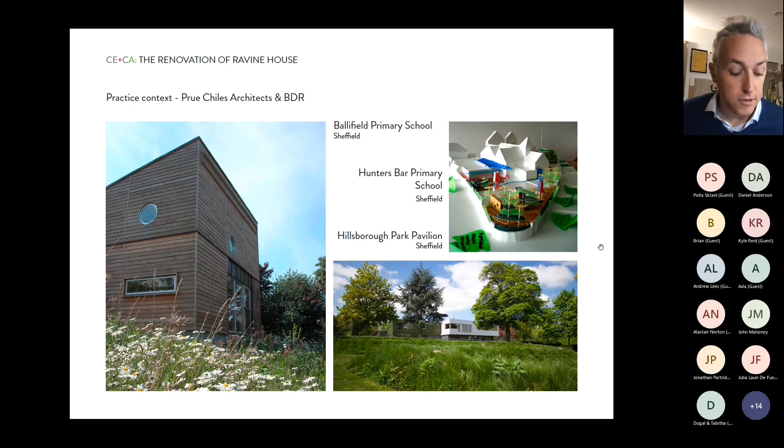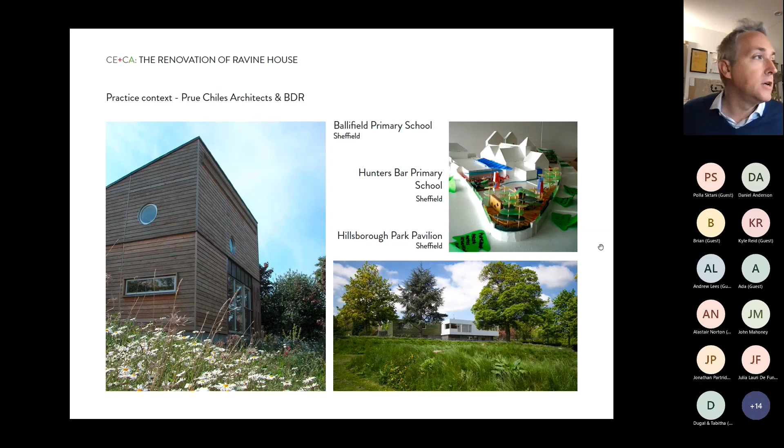So Ravine House - I think our journey to Ravine House starts a little bit before that. The practice was actually founded back in 1999, 2000, and was Prue Chiles Architects. We were sat predominantly very closely to the university, with Prue being practice director, and we started life as a research practice. Through that, we got to work on some brilliant community projects. There was a lot of focus on community-led practice, and we developed a research wing called Bureau of Design Research. Through that, we started to refine what we were interested in.

Our very early work was very much guided by what we term these days as sustainable and retrofit. The first projects being extension to school as part of Classrooms of the Future, and Hillsborough Bowling Pavilion. We were doing a lot of research into schools through this period of time as well.

And then that led on to a focus on domestic and residential architecture and the idea of domesticity, the patterns of life, and how people live, how we can impact as architects on their life, how we can change the way that people live through simple but careful design.

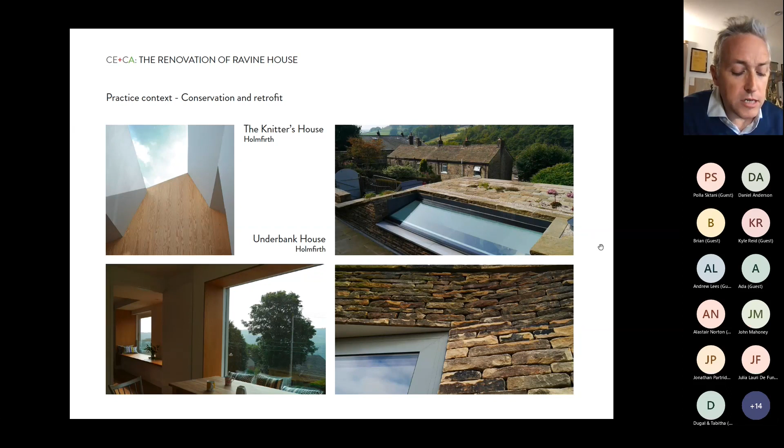And these are a couple of projects that we did up in Holmfirth, Knitter's House and Underbank House. Both of those really concerned with turning living on its head, making spaces where, in a slightly unconventional way, but really spaces that were driven by the landscape and view.

And I think since then, we've really gone down a route of making beautiful but sustainable architecture. I suppose we don't badge ourselves as passive house experts, but it's very much about how you get the fabric of the building right first - how you tackle that kind of insulation, windows, and dealing with energy conservation through getting the space right.

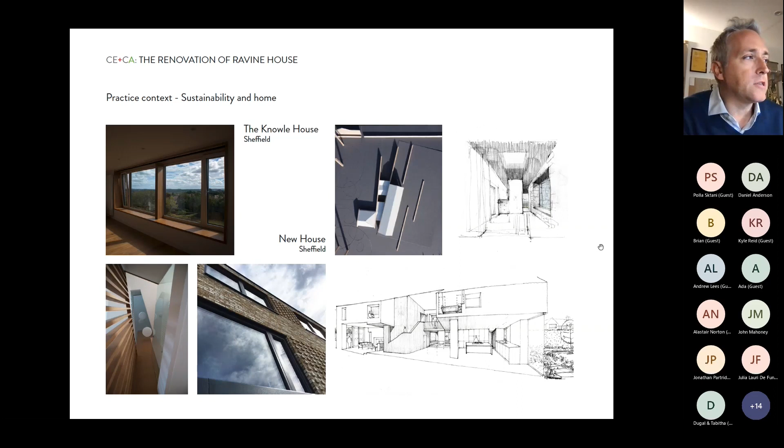And that's led on to a few of our other projects, sort of deep retrofit. But we've never forgotten the idea of community-led design either. So we've worked in schools across London, where essentially we're down there not because of our practice credentials as architects, but more as our credentials as a community and consultation-led practice.

And I think that also led to a strong impact in terms of some of the competitions that we've entered. From times gone by, the Green Homes competition up at Arbourthorne - obviously there was a scheme there that was built by Matthew Lloyd Architects. We still like to think ours is slightly better though.

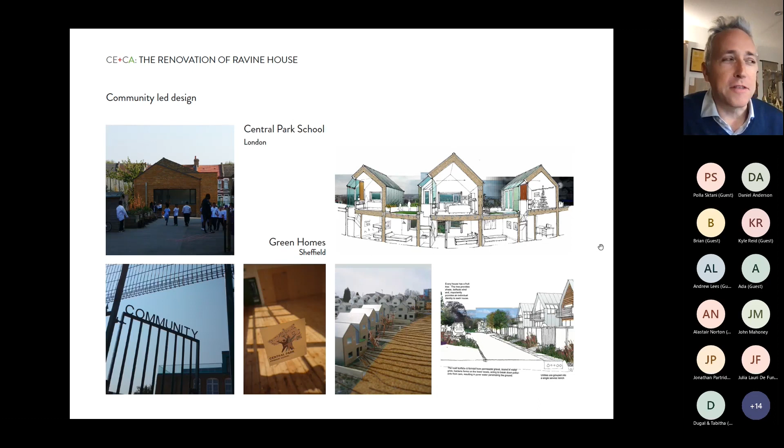And we continue to write as well. We continue to practice as researchers. Leo, Prue and myself are all part of universities - Prue at Newcastle, Leo and myself at Sheffield. And that remains a very important part of the practice, that all of our design work is impacted by our teaching and research practice.

Some of that is about making architecture fun for the users. The project here, Earlham Primary School, was about taking the worst spaces in a school, the toilets, and making them into something sustainable, and making it apparent to the kids the processes that run and operate a building. So the toilets ended up going from the worst space in school to the best place in the school. The school actually had the problem of too many kids wanting to go to these loos, because they could see that by turning on a light, it was generating electricity from the roof.

They could flush the toilets using rainwater and so on. So that sort of sharing that journey with the children became a really key part of that project.

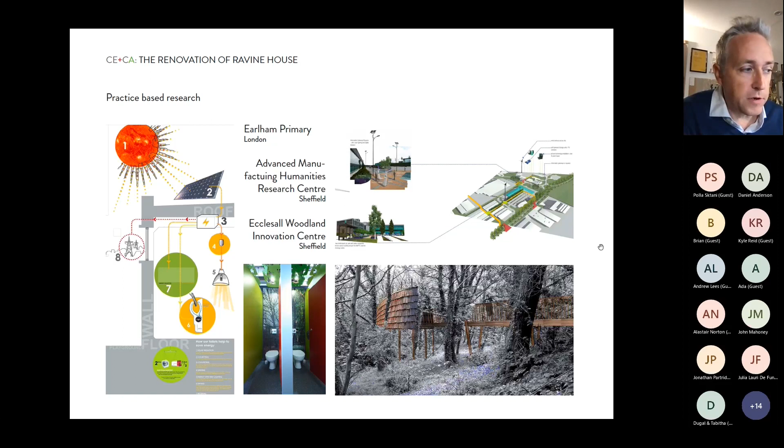And then other parts of what we've done over time is look at more larger scale or infrastructural projects, from a sustainable network of power generation at the AMHRC to low carbon timber design at Ecclesall Sawmill site.

Obviously amongst the research comes publications, and I think this was a book that we were all really proud of at the time. It's only just out of circulation now. We got the final few copies from the publishers last year, but really at 10 years old, it was quite an important publication at the time, focusing on the best practice school design around the world.

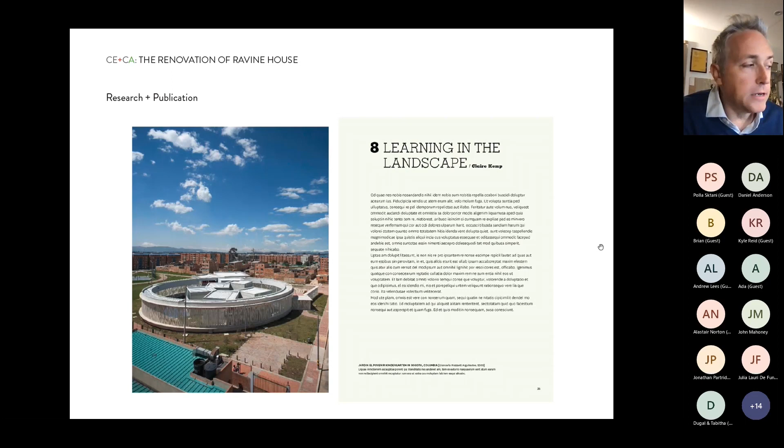So all of that kind of leads us to our approach to Ravine House. Ravine House is a project in Derbyshire, and it was a beautiful building built in 1967. At the time, it was built to the very best of the materials available to them. It's an incredible house, and when we found it, it was in remarkably good condition. It's just that the technologies we use to build have changed.

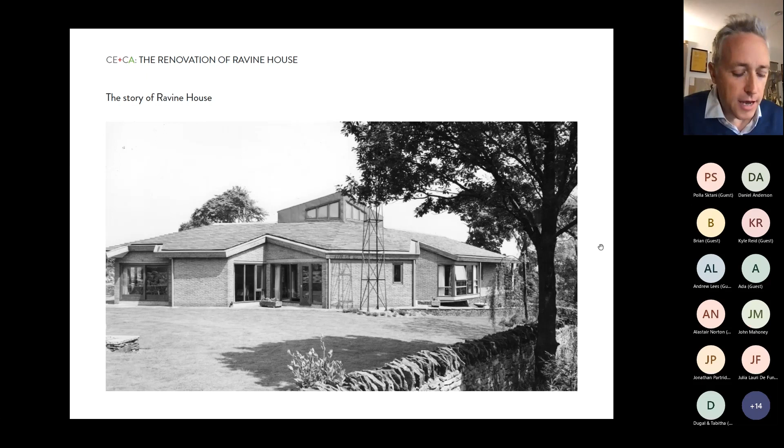Our client's brief was to knock it down and start again, to build it again, but this time warmer please, and they wanted it to look the same. We looked at it and we were like, why would you knock it down? It's incredible. So we took this and argued that this building was really important.

So we took the clients on a journey of digging out of the archives all of these really important things. We had the original plans, and you can see it's this quite geometric plan form centered around the living room at the heart of the building. The blue hatch on the plan at the top was an underfloor heated driveway, and we've got evidence of the clients actually applying to the electricity board to have a substation put in just to power the underfloor heated driveway.

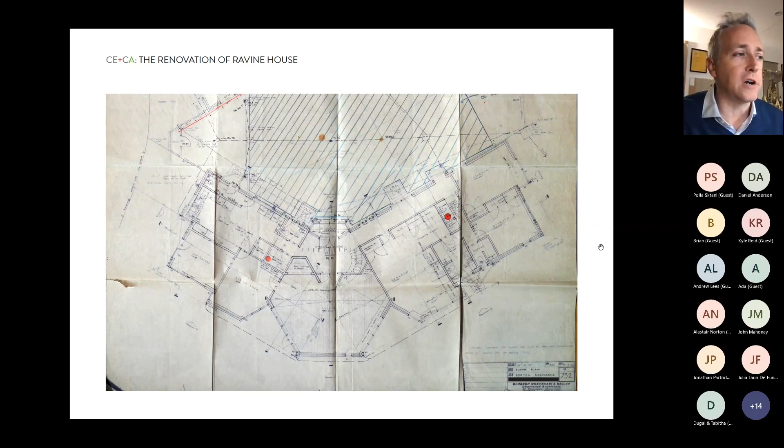So these days we'd look at that and go, oh my God, heating the air, you're crazy. We were really lucky in as far as we had all these incredible documents.

And for those of us who suffer the rigors of the planning process now, the image on the left is the original planning application. They wrote to the council and said, we'd like to build a house because we need it. And the local planning authority wrote back and said, yes, go ahead. No pictures of what this house might be, no pictures of how big it might be, no plans, elevations, sections, design and access statements, nothing. If only life was that simple now.

Other things that were really interesting, we started to get an understanding of the innovation that this project had at the time it was built. The heating is likely to be underfloor electric, and what we found as we unpeeled the layers of the building was very early electrical underfloor heating, which had long since broken. The windows were made to fit the design but using the latest Pilkington fused double glazed technology, so these are some of the first double glazed windows in the country. It's incredible that we've got this chain of communication.

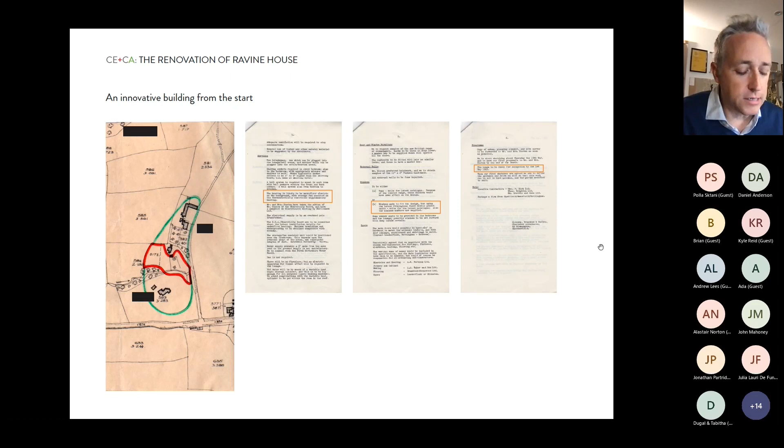And then the house must be ready for the 1st of May 1967. It was a little bit late, and that was because of the windows. So this is the state of the building that we found.

Remarkably good condition, we had a structural survey done and there wasn't a single piece of cracking in the mortar. The roof timbers were fantastic quality, although the roof slates, a concrete tile, were very much at the end of their life. You see things that had happened over time, like the timber work had been stained a deep black, but actually underneath that black stain was really good quality timber with very little rot anywhere on the building. So we were faced with a building that was in remarkable condition, to be honest.

It also sits in an incredible landscape. The landscape was planted long before the house was actually built, so it's always sat in this mature landscape. We even had access to the original clients' and builders' diary for all of the planting - an address book with all the Latin names of the plants listed from beginning to end. So it provided us this fantastic record of a mid-century garden design as well. And you can see there on the contours at the bottom of the map why we called it Ravine House in the end.

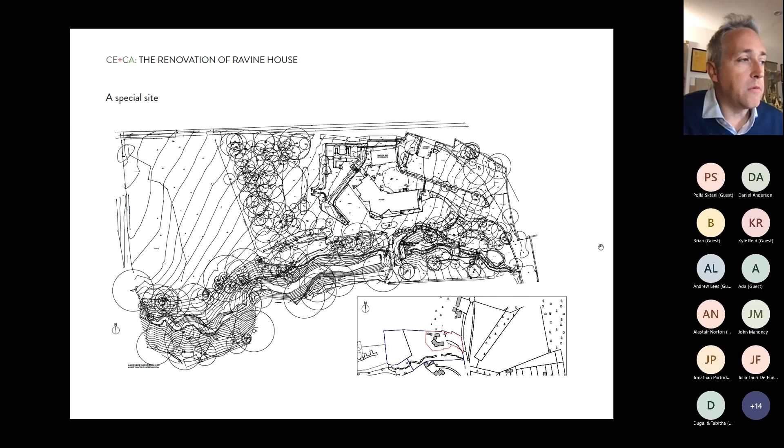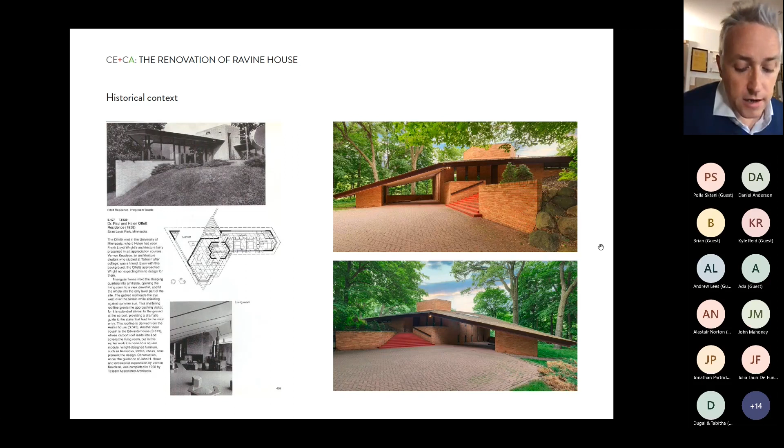As part of this journey of telling the clients what special building they had, we went back through the archives and found this building - the Olfelt House by Frank Lloyd Wright. It's one of the last Frank Lloyd Wright houses built, dating to about 10 years prior to this, 1958. The plan form has so many similarities: these two wings, this geometric shape, the long overhang roofs, even down to the depth of that roof and the chamfered eaves, and the way that building sits on a plinth in the landscape. So it became apparent to us that this building wasn't something strange within the Derbyshire countryside - it was actually really well informed by architecture that would have been in vogue at the time.

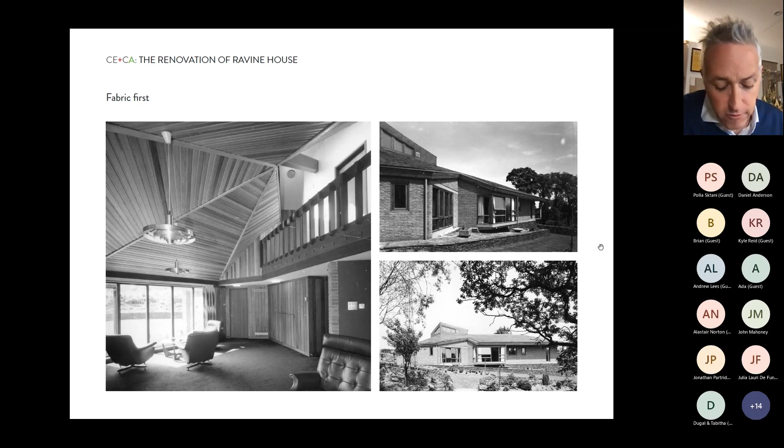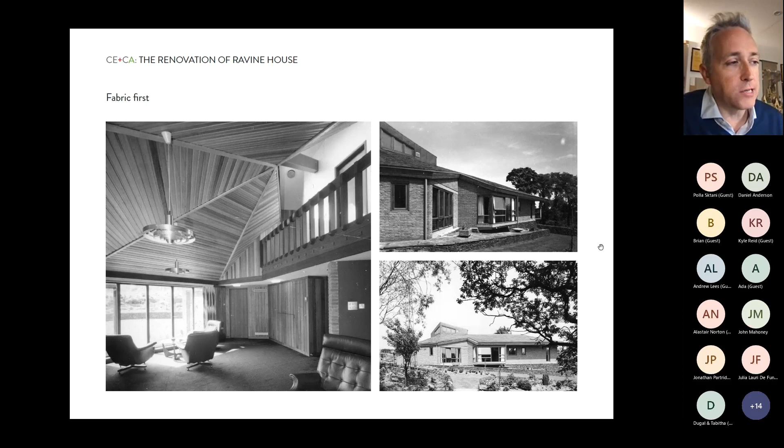This central space, the double height living room with this wonderful Parana pine ceiling - we decided that whatever we did, you'd never be able to replace that, so we had to protect it at all costs. Then you can see the garden elevation, the younger planting around the building at this stage, and the way the building sits onto this stone plinth as the topography shifts down.

So all of this built a picture with the client, and this is how we helped the client understand how special their project was. We managed to bring them on board with the idea that this wasn't a new build, it was actually an in-depth conservation build.

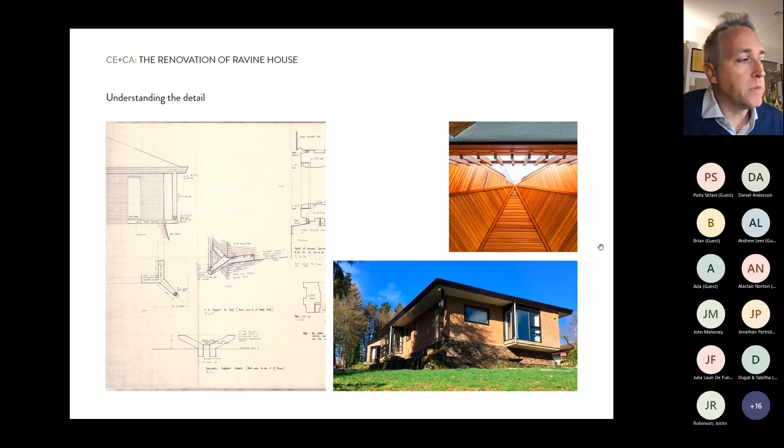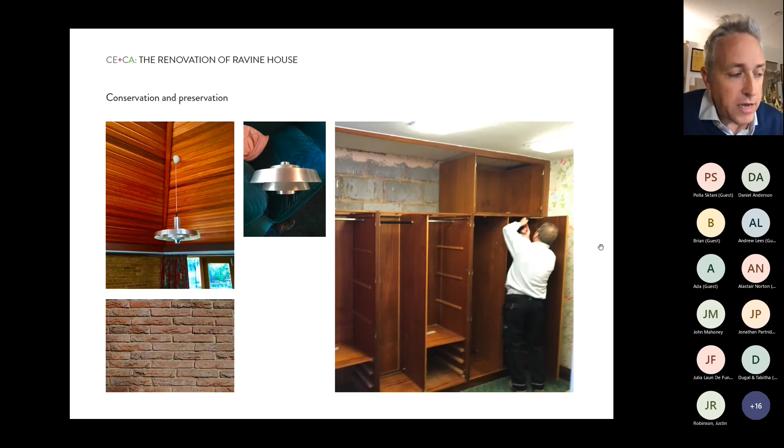So we had this wonderful trail of information, which led to a very rich knowledge base before we started pulling the building apart.

We were very lucky to have a really good team around. The client was really heavily engaged, and we brought the contractor on at a very early stage. We had an energy consultant, because as the project evolved, we decided it wasn't just about conservation - it was about, if we're going to do this and make the building warmer, how do you do that in the best, most sustainable manner?

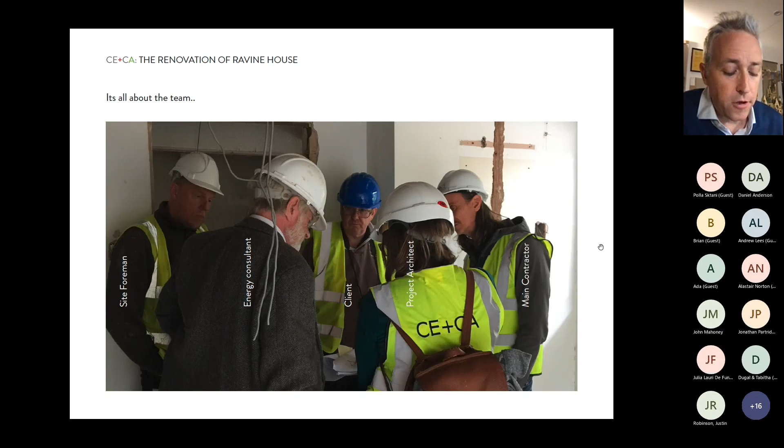So we reached out, and at this point we started to look at the whole house energy system. The consultant was able to advise on ground source geothermal heating, PVs and MVHR. Then there was the expertise of the site foreman, with their interest and specialist knowledge in working with this age of building, but also working on ultra-low energy homes, passive houses, etc. So this is where we ended up with the whole house energy system.

On the left, not proposed—on the left it was the initial stab at it. So we were going to remove the gas connection, we were going to have the MVHR system, and we were going to wrap the whole building up in a sealing layer.

In the end, what we did was we removed the gas connection and dug a borehole. The borehole provides both drinking water and heating water, then returns the excess water to the stream nearby. So we've got a heat pump, underfloor heating, the building's airtight, and we've got an MVHR and solar panels which generate enough electricity to counter the impact of having all of these pumps running almost constantly.

Down the bottom of this page are sketches we were doing in stage 1 work, really early in the process, working out whether it was achievable to actually retrofit this building without taking away too much space internally.

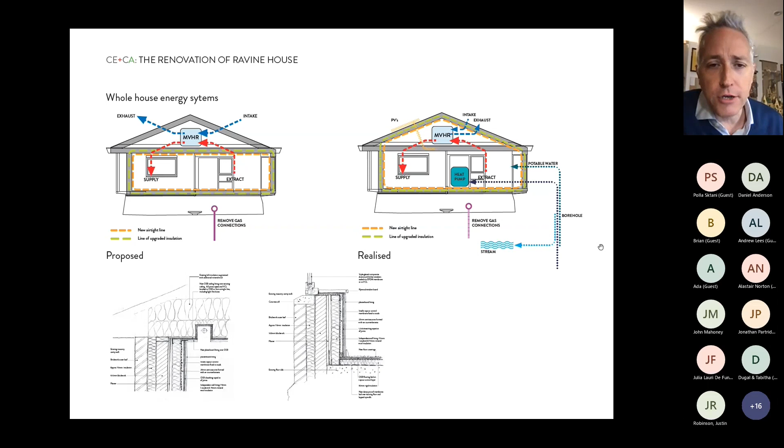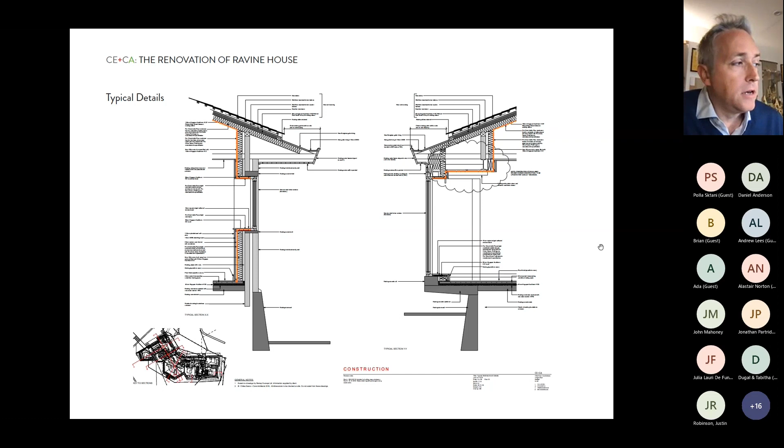Typical details—it's really hard on a project like this, doing retrofit, to get all your airtight layers in, particularly where you're wrapping around existing bits of structure, trying to iron out cold bridges. When you didn't really heat the building in the 60s, cold bridging wasn't really a particular issue, but as we were raising the standards throughout the building, we had to be very careful that we weren't going to get dew points in unexpected places. So the strategy evolved as we moved along.

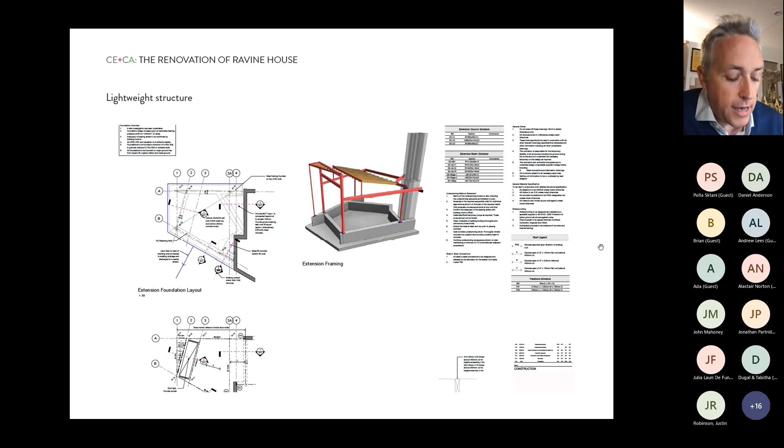The other part of it was where we were adding to the building, we wanted to make sure it was a very minimal structure, that we didn't add lots of heavyweight stuff. The client threw us a curveball—they wanted a sunken seating area because that was very 60s/70s. So we ended up with this concrete pit, but coming out of that was this very lightweight steel and timber structure to deal with the extension.

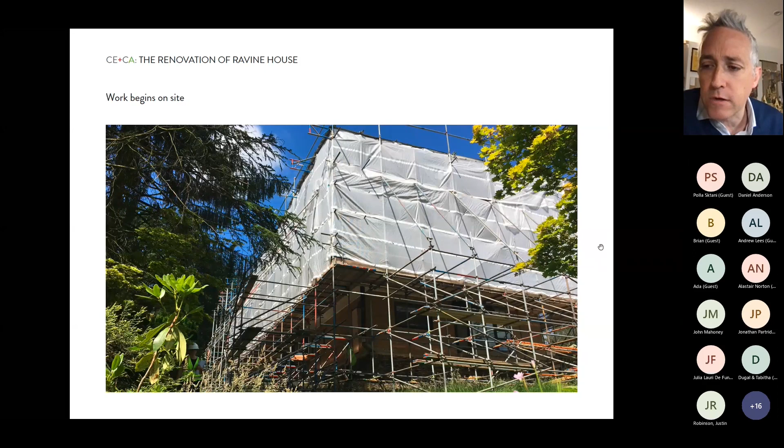Then we begin work on site, and in order to protect that beautiful ceiling in the middle of the building, we had to tent the whole structure. I think the poor client nearly fell off their chair when they were passed a quote for £55,000 worth of scaffold. But the advantage was that we worked throughout all seasons, all weathers, because the building was tented—essentially like working inside a factory.

We were able to peel back the roof structure and find the original roof timbers were in as good nick as the day they went in. They were perfect—there was no rot anywhere.

Having this tent meant we could take our time thinking about details, thinking about how we were going to layer up the building, where the breather membrane was going to go, and how that was going to work as you went—whether we put it underneath or over the top of the joists.

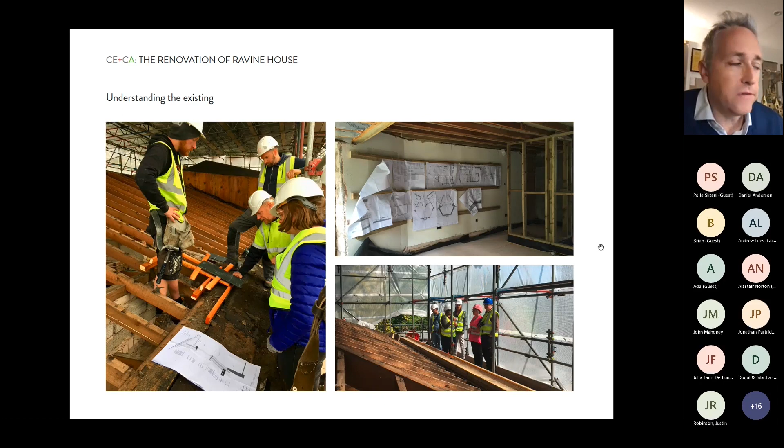That was not an easy decision, because everywhere else we made the decision to go underneath the roof, but where we were protecting this roof, we had no choice but to go on top of it. So it was making sure we had continuity between these layers, between this change of approach between underneath and on top, and also trying to work out very carefully the impact on the eaves of adding in an extra layer of 100 mil of insulation.

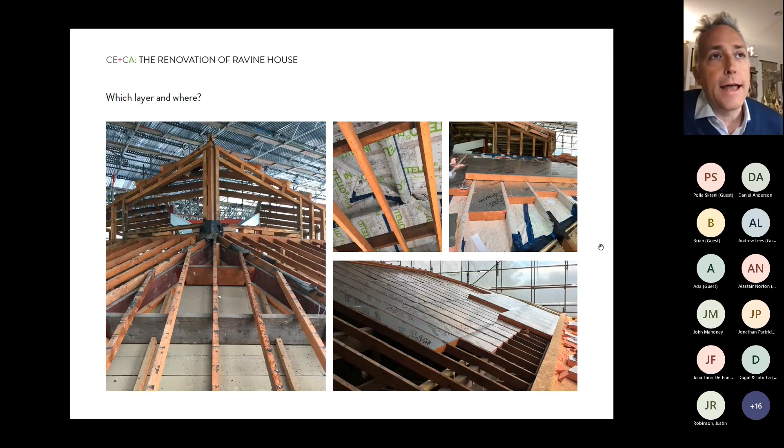We explored all types of insulation as well. We looked at low carbon insulations, but ultimately, because we're working on a conservation project, we had to draw a line and go with the thinnest but highest performance insulation that we could use.

These are some of the results of that—you can see the airtight membranes are all internally installed through the main building, all taped and joined to the wall structure, so we've got no breaks in that.

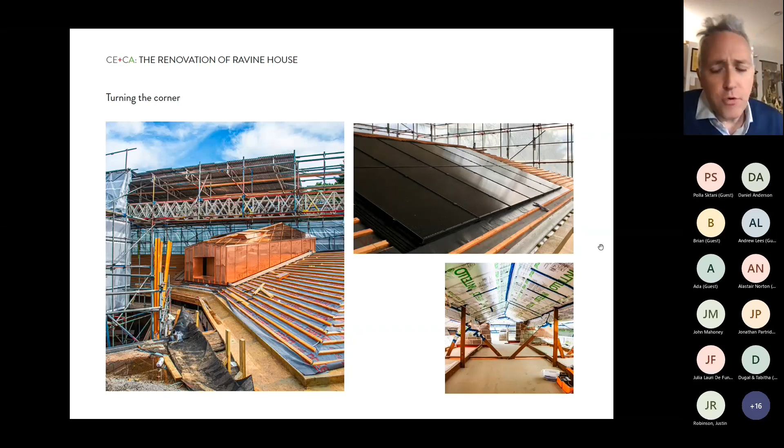We've got the solar panels set into the slate, and we've restored the copper cupola that was originally there. You get little clues that the building has changed—previously the window had been a very surface window, but we pushed the window really deep into the reveal to give it a bit of solar shading from the south facade.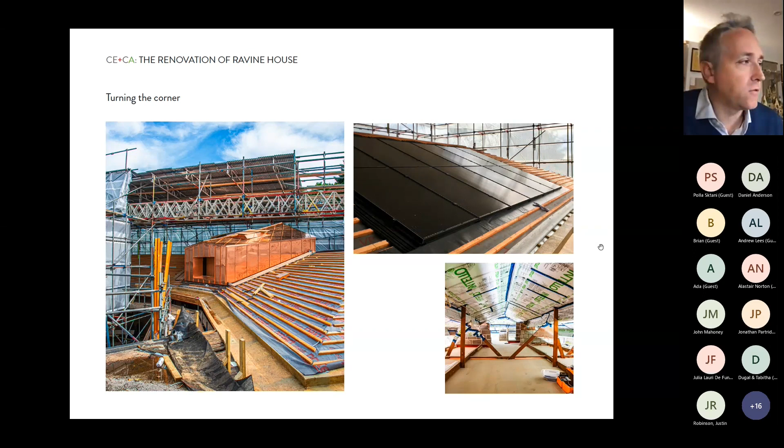And again, this is the extension. This is looking at water control, air movement and vapor control. An incredibly difficult set of parameters where you're working with the structure, with the windows, trying to get the insulation to be as high as we could, but without necessarily compromising other parts of that structure.

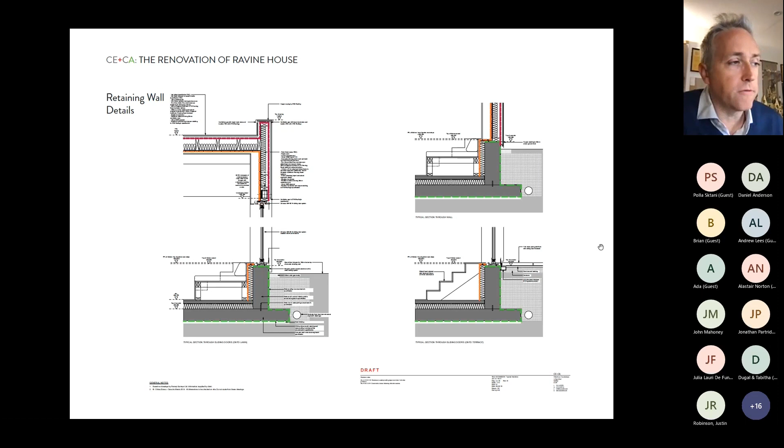We were also really lucky enough to work with some fantastic tradespeople. While we were doing this roofing, it was in the middle of COVID, and the copper roofer was very happy to be on site on their own, working away. That meant we could go up and work with him in real time, refining the details to make sure that where we had integration of roof lights and integration with the existing building, everything came together in the way that we wanted. So COVID actually lent us a favour in a way, letting us slow the process up and work at a kind of pace with the craftspeople.

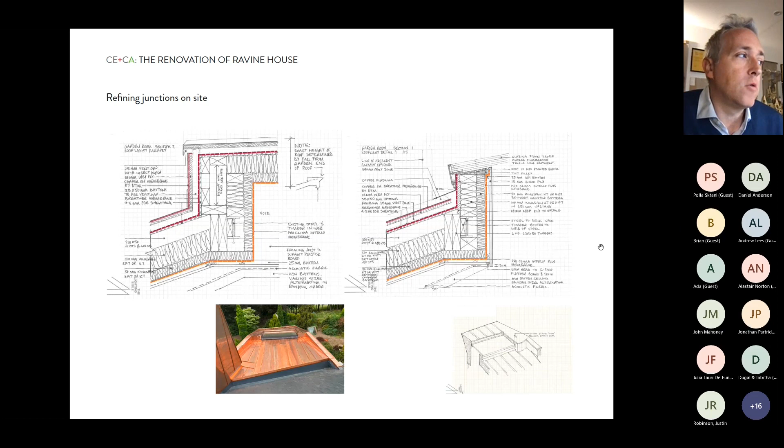Moisture is the bane of all of our lives, I think it's fair to say. We had to work out, in an area with quite a high clay base, what we were going to do in terms of moisture control for the sunken conversation pit.

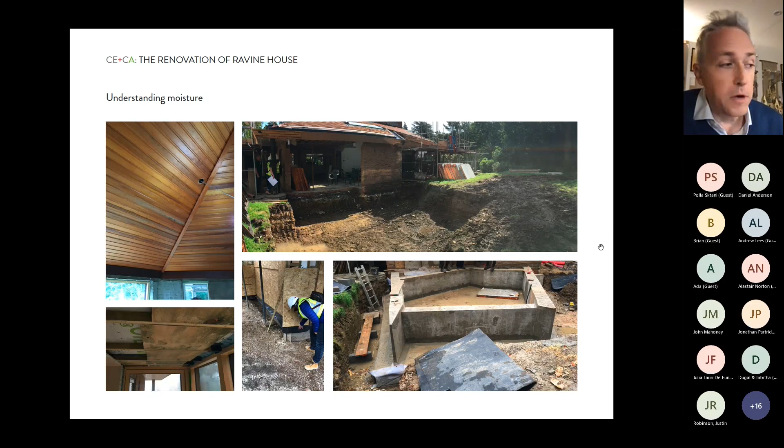Also, we came back after the Christmas recess to find, to our horror, that the roof over the central space had a whole load of surface moisture on it. What we discovered was that in the run up to Christmas we'd plastered out the first few rooms, and the moisture from the plaster, with the building all shut up over Christmas, was enough to put a layer of damp and condensation onto the roof, which had then turned to mold. Fortunately, very simple to rectify, but a moment of horror as we walked on site post close down.

Coming back to the whole house energy approach, the theoretical diagram versus reality: underfloor heating pipes going in at slightly closer proximity because they're running at a constant but lower temperature to deal with the ground source heat pump; digging a 50-foot borehole, actually a 60-foot borehole, into the ground—not particularly deep, but deep enough; and then making sure we're working with the solar installers, joiners and roofers to make sure the roof is as unobtrusive as possible, and then dealing with the MVHR in and out.

Unfortunately for us, the energy consultant changed their mind as to where the vents were going to go too late in the day, so we'd already slated the roof. Whereas we perhaps wanted to go through the roof, they've actually come out through the soffit of the building.

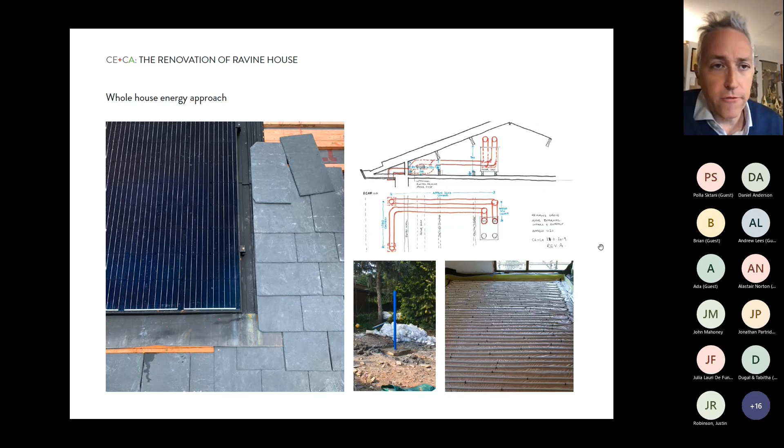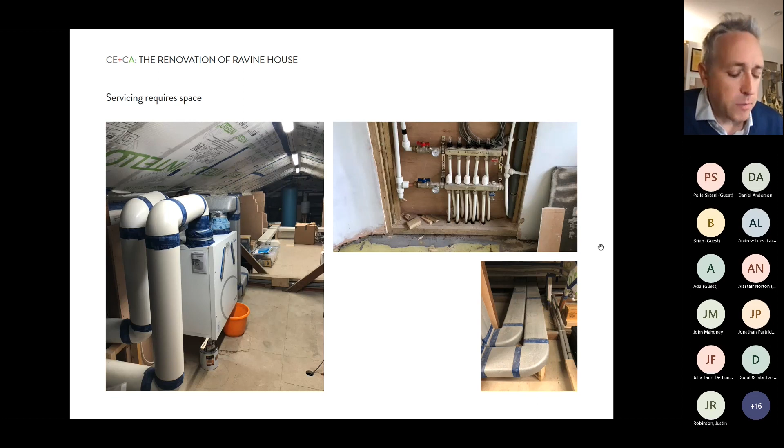I think this is one of the big takeaways from the project: the amount of servicing you need in a building is massive, totally disproportionate to how we think of servicing in a normal house, where maybe you've got a little boiler and a pressurized water cylinder. Actually, with this, we had a big space for the water pump, a big space for the manifolds, a big space for the MVHR. In a project like this you've got that space, but it does make you consider how we do this for smaller buildings.

As with all projects, the clients usually throw you a couple of curveballs. One for us was how do you make an airtight chimney? We weren't given one airtight chimney, we were given two. And the answer is, it's really, really difficult.

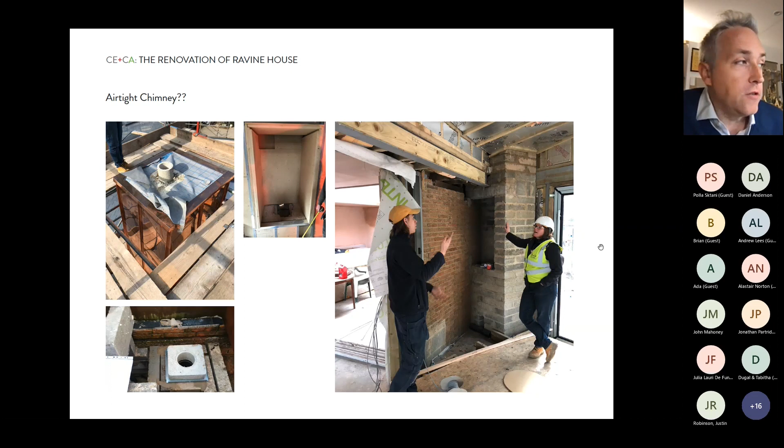We spent hours on site with the joiners and the fire installers. You have to have a very specific type of stove, and then certain types of lining to get around proximity to heat and proximity to the fire. So all of this was really good, really interesting, and quite a steep learning curve in many ways, requiring hours and hours of going back and forth on these drawings. But in the end, it worked.

And as you can see here, different types of drawings for different parts of the project. This was really one where we were trying to explain to all of the people on site where each layer was going to go, and how you achieve that kind of airtightness using standard products, while also observing all the safety regulations you have to have.

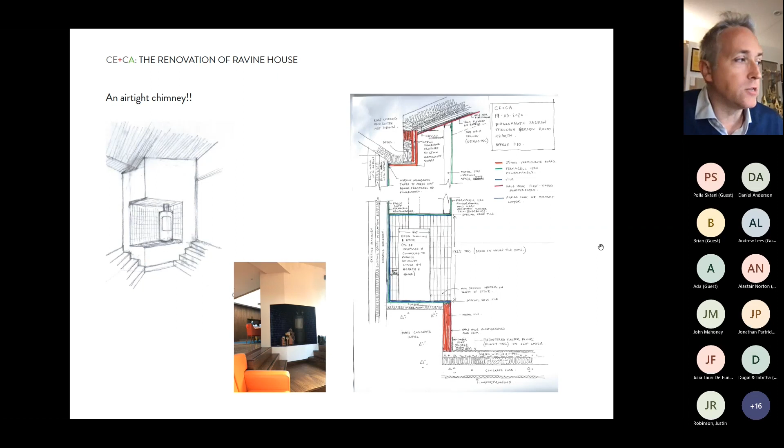So that brings us towards the end of this, and this is revealing some of the details. The ceiling, we've got exactly the same lamps gone in. The ceiling has been preserved. The windows, the proportion of the windows, we've taken from the original building. We've removed a few glazing bars because glass can be bigger now.

Careful work between the copper roofers and the slate roofers meant that we get these really immaculate details where you have absolute perfection where it comes to the air gap below the copper and above the slate. It was just lovely to work with a team that actually cared.

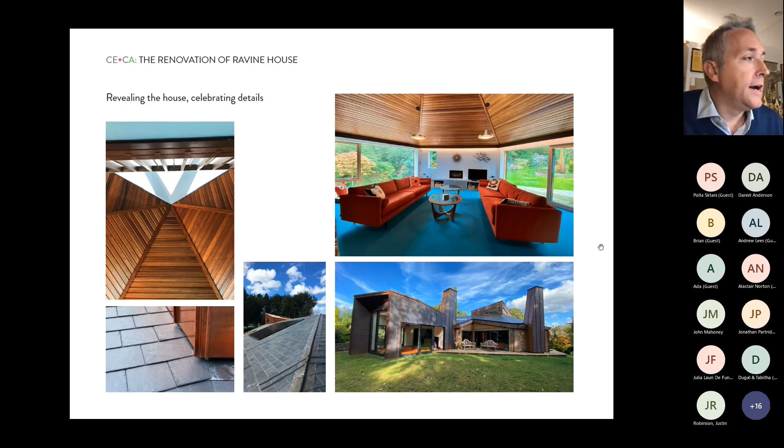And to all intents and purposes, we've met the client's brief: I want you to build the building, I want it to look the same, but I want it to be warmer. And I think in a way, this building's gone so much further.

There are a lot of people that the client knew who knew this building from before, and they come and go, 'so what have you had done?' And then they go, 'oh, that's what you've done.' So we've taken a building that was built to the best of its ability in 1967 and added layers of the best practice that we can achieve now.

And really what we've done is we've just amped up some of those original details. And then where we've added new things, it's done to the best of what we can do now. So the light fittings are the best of what we have now. The way that we've dealt with light coming into the building through roof lights is all about this kind of story of light from the original building.

And reading the original brief, the client of the original build said that he wanted to have at least 2 views of the garden from every room. And again, we've kept to that in the building as well. Particularly from the kitchen, you actually get to see 5 aspects of the garden.

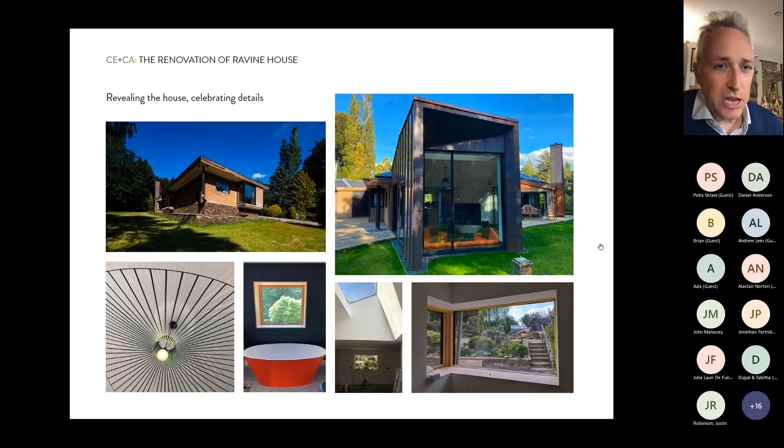So where does that leave us? I think it's really important - one of the questions that the Stephen Lawrence jury asked us is, is it okay just to do nice work for people with some money? And it's like, well, that's architecture, we have to do it, we enjoy doing it. But it's kind of what you learn from that and what you take away from that.

And I think one of the projects that we worked on almost simultaneously, but slightly after we'd done a lot of the learning, was this project for George Clarke on Ugly House to Lovely House. We didn't really want to do the second program - we'd done one before and we thought, well, we've done that. But we went into it partly because we knew the people that it was for.

We went into it with a series of writers, and we said, well, we want to talk about sustainability on TV, on primetime TV. And to our horror, they said nobody's ever done that before on one of their George Clarke programs. We thought this was a terrible thing. So we looked at how we could take those lessons of really well building this, wrapping it in a new layer of skin and insulation, and trying to take some of those lessons learned from a big scale and repeat them at small scale.

This has now led to a lot of the work that we're doing for South Yorkshire Housing Association at the minute. They're looking to decarbonise their housing stock by 2035. It's a massive program of taking these ideas that you play around with, you experiment with on a large scale, on a kind of one-off project, and then try and roll them out.

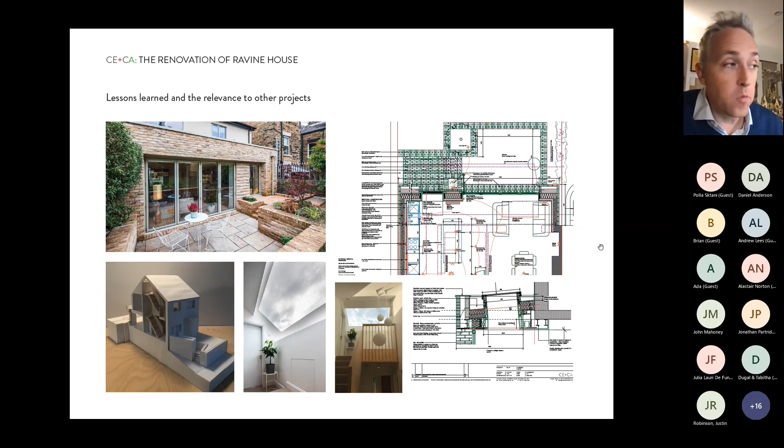So that's very much sort of the project. That's where we've come from, where we're going to, and yeah, that's Ravine House.

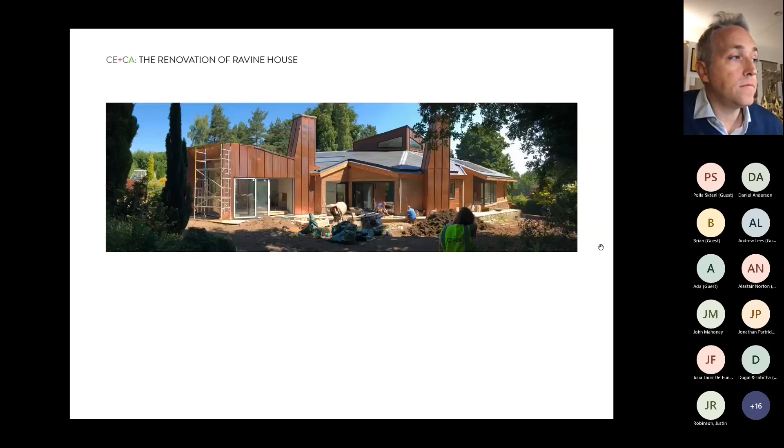Thank you so much, that was a really thorough, insightful presentation. I really love all of your projects, not just this one, but thinking back to Artemis Barn as well, I love how textural they are. With Ravine House it's a really impressive retrofit project, especially going from a heated driveway to what it is now. What tops it is when you said you realized it was in structurally good condition, so you had a bit more budget to use elsewhere, but the detailing with the copper and slate, I love that image. It was amazing, quite heartwarming.